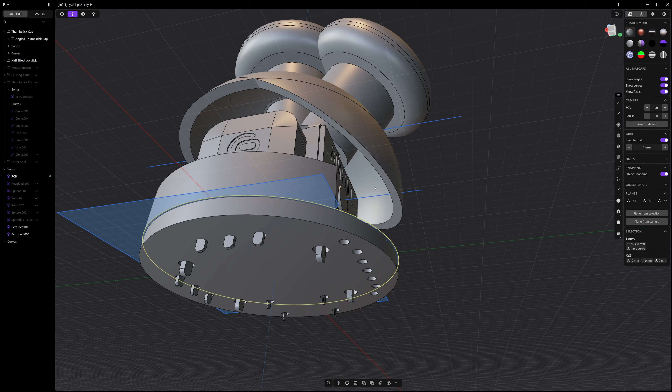Today I thought I'd record the actual design process. I use Plasticity, but the basic principles are tool agnostic. I've used Blender in the past, so it's really up to you which software you prefer. And to be clear, this video is by no means a tutorial. I'm just capturing some steps of the process to give you a general idea of what it takes to design

a product like this. Whenever I work with off-the-shelf parts, having accurate 3D models is critical, so that's where I always start. I found a CAD model of the exact joystick online, but I had to quickly design the thumbstick head. It's a pretty straightforward shape. I just measured the key diameters of the one I have with calipers and lofted them.

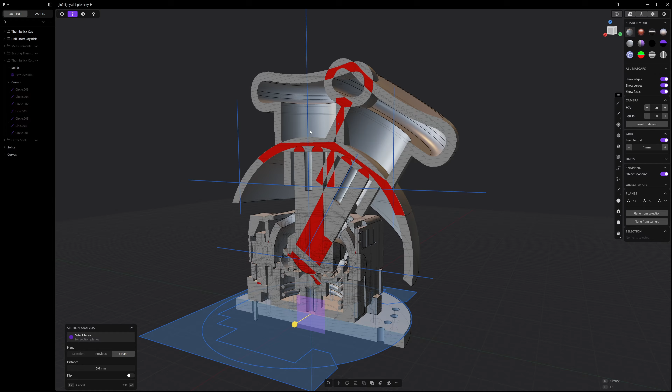The next step was to accurately determine the range of motion. In my case, it's 28 degrees. That's why I'm factoring that in and making sure I find the precise rotation point. With that out of the way, I also made an outline of the joystick to make sure it fits inside the thumb module and that the moving parts don't interfere with the body of the keypad. I also make sure I have sufficient tolerances.

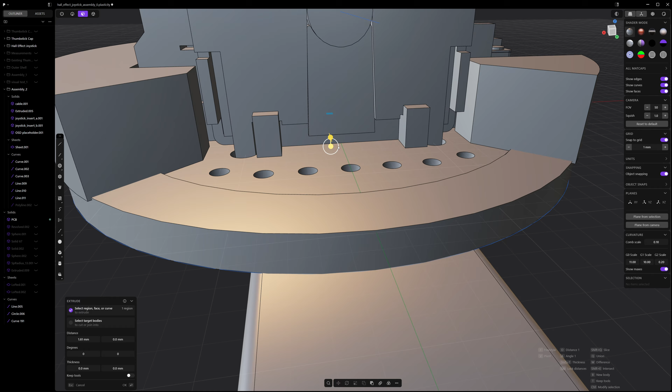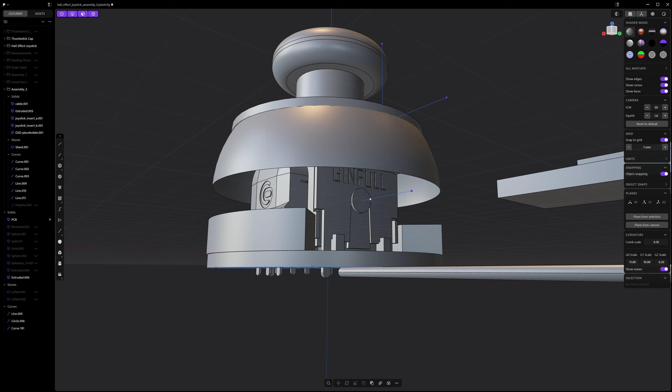At this point, I start thinking about how many pieces I need for it to perform its function and how they will be held together. I'm also making sure I don't forget that a ribbon cable will need to be routed through this assembly somehow. It's critical to think about this early on because I know this will be a length adjustable component, so I need to make sure the cable can move freely. I'm not trying to set the design in stone yet, but each additional constraint serves as a reminder while designing

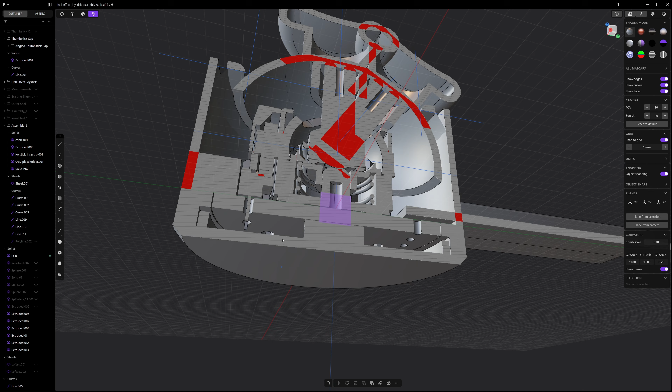it. At this stage, I'm still exploring exactly how these pieces will be held together, but I already have a good idea of how much rigidity this part needs. Since it serves as the main support of the entire joystick, I'm also keeping in mind that this joystick has a momentary switch, so the bottom plate needs to be able to withstand direct pressure.

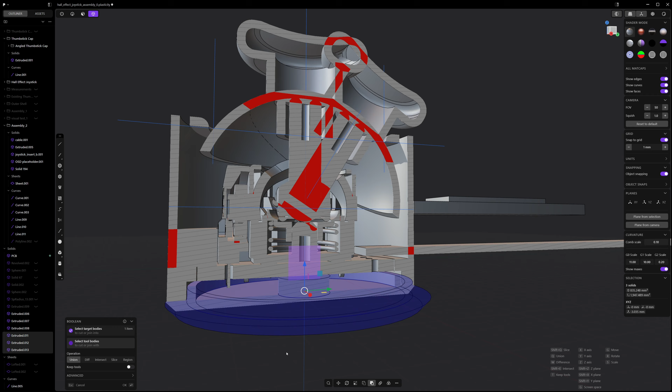In the past, I tried gluing these components, which comes with obvious trade-offs, and I also tried connecting them with screws, which dramatically increases the size of the module. One of my key goals was to reduce the size as much as possible, so the main connection methods I explored were a twist lock mechanism and 3D printed threads.

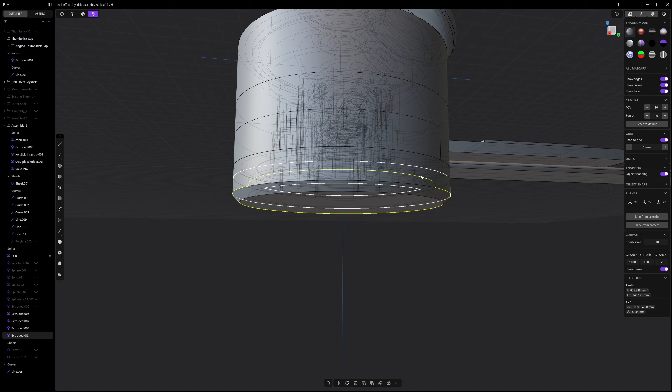After printing several test parts, it became clear that the twist lock wouldn't work in my case. The connection points kept breaking off, and since I didn't want to increase the size of the assembly, I decided to go with threads. They're a bit more challenging to design and print, but they perform much better in my

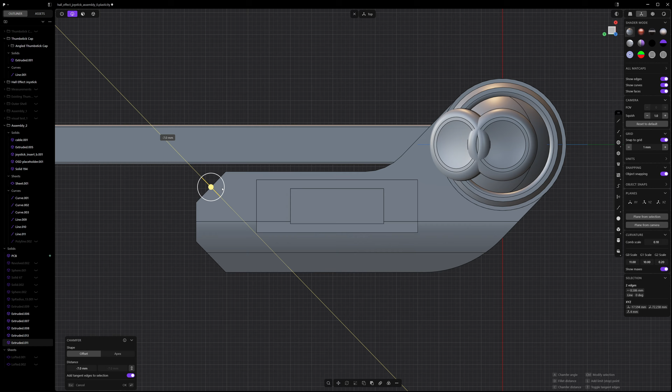case. Before making any final decisions about the shape of the thumbstick module, I made a quick block out. Again, because it's going to be length adjustable, I needed to make sure that I wasn't missing anything. By the way, around this time I figured out how to add OLED display support to my firmware, so I'm also making sure there is enough space for that. In my opinion, the thumb module is the best place for the display.

It does add a bit of complexity since I need to make it work with the rails and two screws, and I also need to make sure the ribbon cable for the display can move freely. But I'll worry about it later. I already have a few ideas for how to make it work.

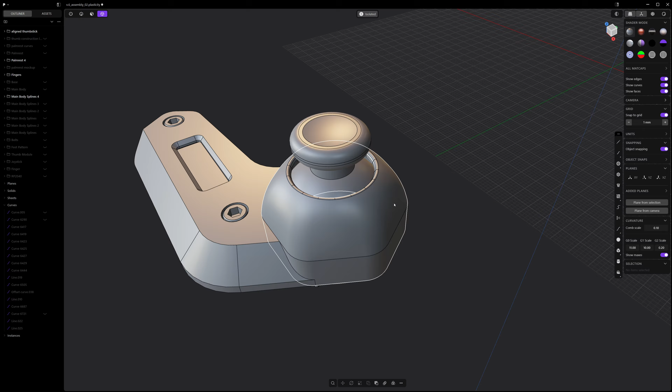I really like this hexagonal shape for the thumbstick, so that's what I decided to go with. Let me show you how I designed it. I have this couple of reference objects as I mentioned earlier. I'm not going to build it precisely, this is just a demonstration, but it's still nice to have this reference

in here. So we'll start with the circle, and I think I used something like 18 millimeters for the opening. So yeah, that should do it, and the location would be somewhere here.

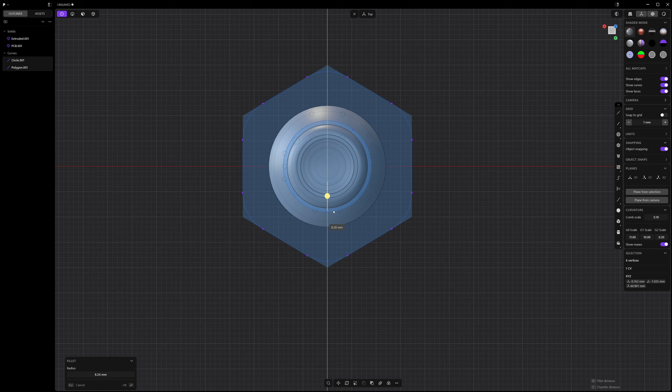And the trick here is, 1 second. Let's move it somewhere here. So the trick is, it's pretty simple. There's no trick really, you just loft it. But you see you get this cone, so we will not be replicating this spherical shape. So it would be really nice if it had some space for the hat. So basically if it was a little bit rounded. So we'll figure that out right now.

The way I did it was I used the curve and I connected these dots over here like so. And again, in this demonstration, it doesn't really matter. I try to do my best to match the curvature of the half sphere. But for now, I think it will do.

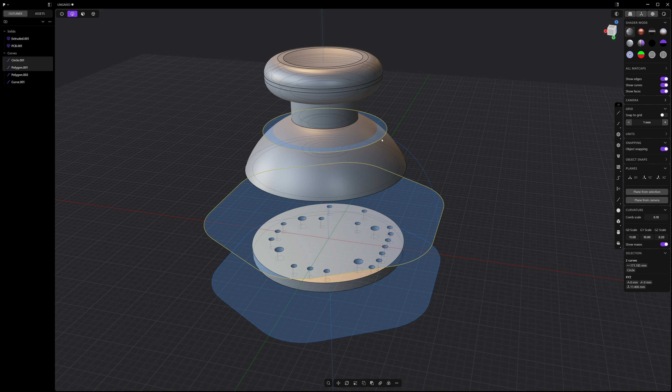And the reason I did this is because it allows me to loft these two geometries through this curvature, except that you probably can already tell that there's a little bit of a problem. It does it here on this face, but the rest is basically straight line. So in order to have it circular, we also need to add a radial array.

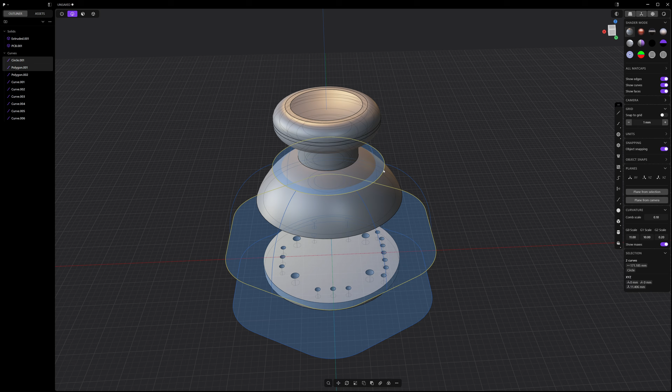And this is our center. We need 6 lines in here, 6 curves. And I think that was pretty much it. So now when I'm lofting it and I'm including these curves one at a time, I can replicate the exact spherical shape that I need. And from here is just another loft, joining these parts.

And I'm also adding another thickness in here. I like to use 1.6. This accounts to 2 walls when 3D printing it.

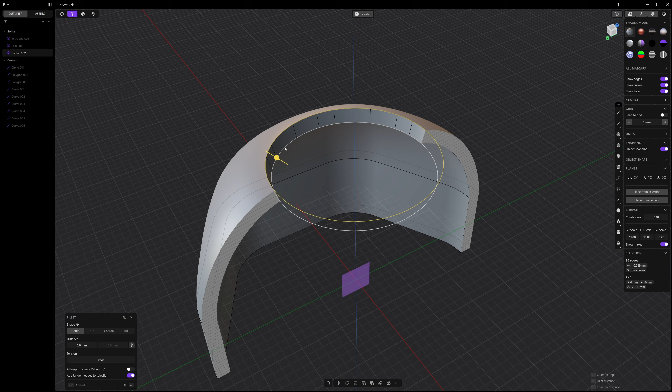So yeah, this is how I made that thumbstick dome, where I connect hexagonal shape to the circular shape through a half sphere curvature. The second major piece of this puzzle was to add threads down here. And the way I did it was through using a spiral tool. So let's see if I can replicate it in here. Yeah. Okay, I'll delete these curves. I no longer need them.

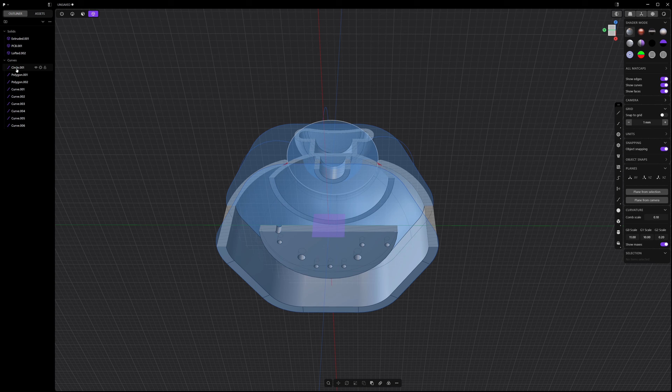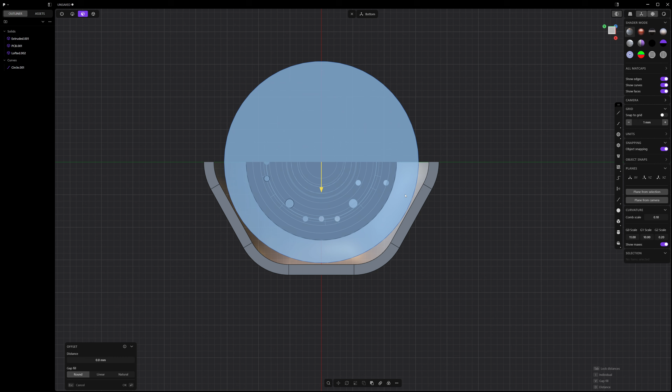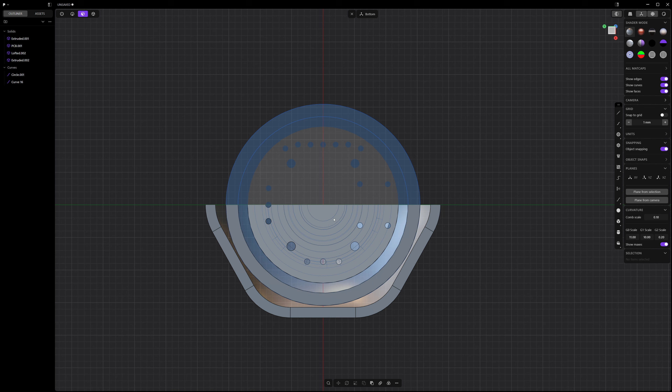So what I'm going to do, I'm going to add a little bit of thickness through offset. It doesn't really matter how much in this case. So the key tool is spiral. And I think this is my outer diameter. I'm not trying to replicate any particular metric or imperial threads. I'm not trying to make it compatible with anything. It just needs to work well with 3D printing.

In my actual design, I think I used 2 full thread loops throughout the height of this screw-in part. So in here I have 4 turns, which, if we cut it, it seems to be pretty close to how I had it in the design. So I'm going to go ahead and okay this.

And I could definitely model my own profile of the thread, but I felt like there was no need to overcomplicate it, so I used the pipe tool for this. And I just reduced the number of sides to 3, and I rotated them to have the pointy bit outwards. And yeah, this is pretty much my threads.

So of course I had to add tolerances in here. Well, first of all, I had to model the same profile on the screw-in part. So this is the inner part and this is the outer part. And I also had to add some tolerances. But yeah, this is pretty much how I got it done.